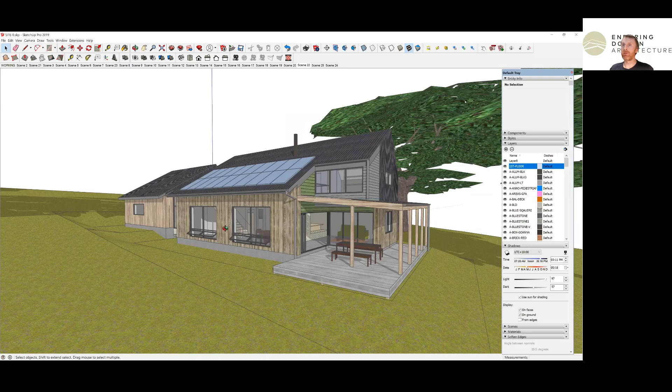There is a slope from east down to the west, and also some well-established mature native trees, so those things are all very important to show in the context of the model. In terms of the slope, we want to have an idea of the amount of cut and fill required to create that flat bench to put our slab down. We don't want any surprises when it comes to the amount of excavation involved. We want to know before the day how much cutting and filling is going to be. The structural engineers want to know that too, so they can design their footings appropriately.

Also, the trees - it's a good idea to know where they are, how tall they are, just to see if there's going to be any overshadowing to our building.

So in this case, we've got photovoltaics on the roof. It's an off-grid home, so it's vital that they are exposed to the sun as much as possible. Not only that, but solar gain - the principle of sun entering the building via the windows in a controlled manner - is very important to actually heat our building for free during those colder months. But then we want to know that we can exclude that higher angle sun as well with our roof overhangs. So the whole thing is really a design tool to make sure we're getting the sun in when we need it, and not in when we don't want it.

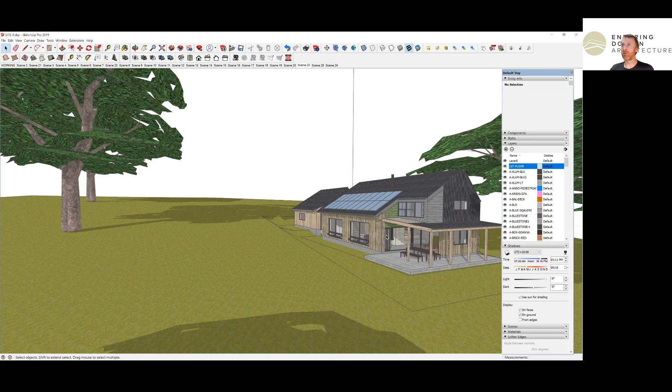So we can look at different times of the year, different times of the day, to make sure everything is happening as it should. So there's two elements to this building.

On the left is the garage, the shed. We have a glassy link, which is just a sheltered area to enter either of these buildings, that can also be used to propagate some seedlings, have a kitchen garden happening in a planter bed here throughout the year. The main house is in this bigger form here.

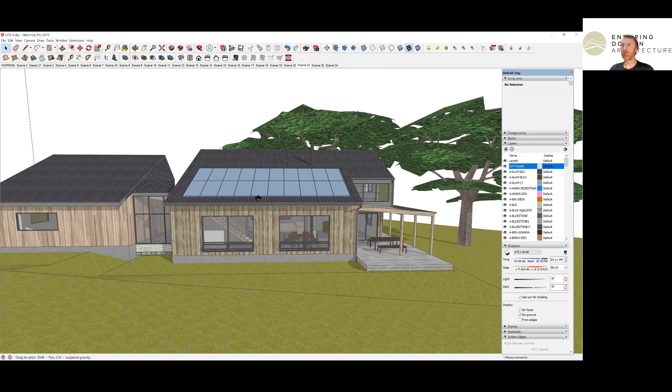It's not a huge building footprint, but we're packing a lot in because it's a loft design. We have a mezzanine floor - if I can show you a section - so we've got bedrooms upstairs overlooking this bigger volume. We're very careful about the proportions so as not to make these volumes too huge, so that it wouldn't be cozy feeling or difficult to heat.

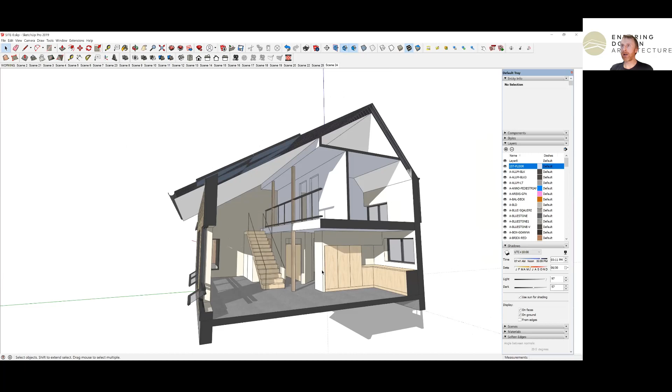We've got these lower spaces at the back on the south side, which will be quicker to heat up. We've got this masonry heater at the back here, so heat will flood these lower spaces towards the back before spilling out into our main space, and then going upstairs into the bedrooms.

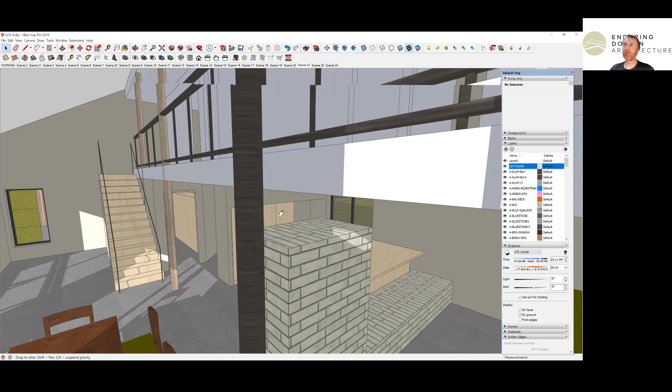So we've got this catwalk kind of access where we can look down onto the void below. We're borrowing lights, we're allowing air to move through the building. We've got these awning windows down the bottom, which we can open up. So in summer, we open up these ones up the top here and get this stack cross-flow ventilation to cool our building. So no air conditioning will be required in this building.

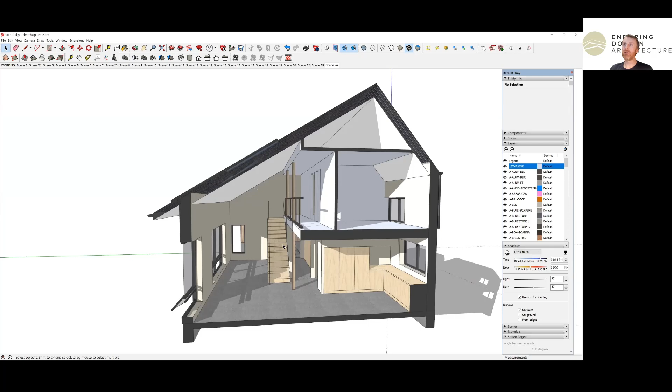A bit of heating with that masonry heater - they've got plenty of access to firewood, so that's quite a self-sufficient, sustainable form of heating. They won't need to be burning a lot of wood to heat such a home.

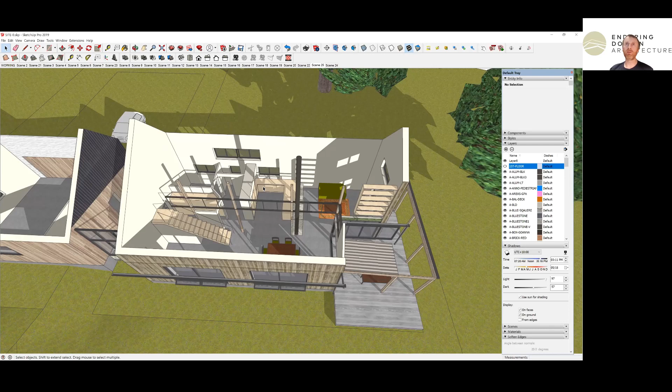I can show you with the roof off how all that's working together. It's quite a compact form, so there's not a lot of surface area compared to the amount of volume we're enclosing. That's the ideal thing we look for in an energy efficient home, so we don't have a lot of external surface area through which to lose heat. You lose heat even through good insulation, through good windows, just at a lower rate.

So if I stop that share, I can show you some photos.

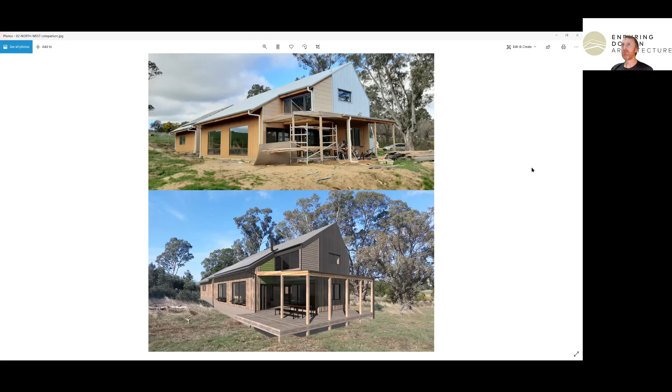Okay, let's have an actual tour of the built thing. So here I am at a new home being owned and built by a couple of my clients out at Metcalfe. This is my first visit since construction started, and I must say I'm very impressed by what they've done themselves. They've been at it for quite a while, and the work is really amazing. This is actually a Hempcrete house.

What you can see on the outside of the building is a WeatherTex cladding. WeatherTex is a vapor permeable cladding product. In this case, they've also used it as permanent formwork for the Hempcrete, which is tamped internally within a frame. The WeatherTex stays on the outside, used not only as bracing for the structure, but also to give weather protection to the building. So that's a natural WeatherTex. It comes in that brown colour, but that does grey off as the weather gets on it, or you can oil it if you want to keep it a rich colour.

So there's two parts to this building. On the left hand side we have the barn, the garage, which has the plant room and the solar panels on the roof, which you can see. This home is actually off grid. Nothing here is connected to outside services, so they're completely self-sufficient for power, water collection, and waste treatment. Everything is dealt with and produced within the site.

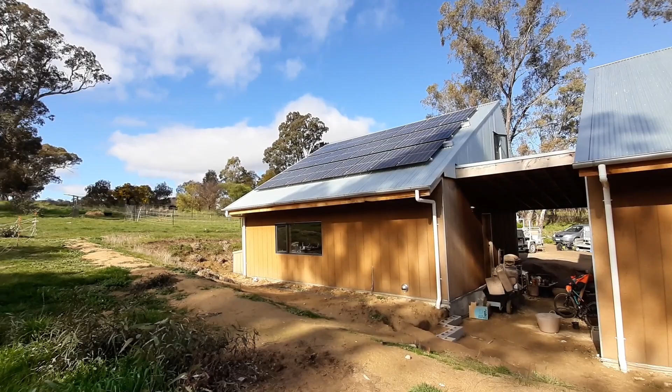Standing outside the north facade of the building, so the building is orientated to face the sun, which is in the northern part of the sky. That's one of the most crucial things when planning out a new home, getting large windows of your living areas facing towards the sun. This is going to get the sun in all day, or throughout most of the day, during the colder months when the sun is low in the sky.

Penetrating through deep into the building, hitting a thermal mass floor, storing the heat. This is what's going to give you free heat throughout the colder months and provide a fairly constant temperature to your building. But also in summer, conversely, any sun getting inside the building, or any heat building up inside, is getting absorbed by that concrete slab, which can then sink that excess heat down into the ground, being an infinite source of thermal mass. A lot of people talk about insulating underneath the slab as a way to better keep the winter heat in, and yes, that will happen, but you also have to consider what does that do in summer.

If you're getting a week of excessively hot weather, 35 to 40 degrees, and your building starts to heat up, does that heat have anywhere to go? Insulating under the slab can actually have an adverse effect. Once that concrete slab is saturated with heat energy, there's nowhere for it to go except back into your building, further heating it up. So we carefully consider whether or not we insulate slabs.

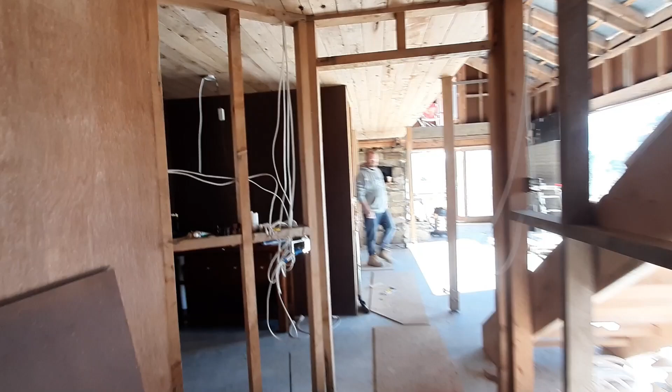It's all right, you're only on video. Here's the hard workers.

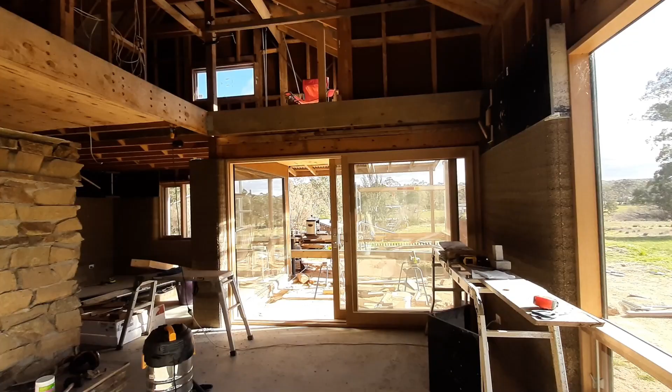This is a section of completed Hempcrete wall. At the top you can see this black form ply which forms the shuttering or formwork. This section on top of the wall is where there's still Hempcrete yet to be tamped down into the void that's created. Below, you'll see horizontal lines - each band is a layer of Hempcrete tamped into the formwork. This formwork moves up the wall as you complete each section.

As soon as this is dried enough to move that formwork, it can be removed and lifted up. So we're just going up the wall in small sections, tamping that Hempcrete mixture - which is like a wet mixture - into the formwork, into the void, which is about 300 millimeters thick. So we've got 300 thick walls, quite a thick, sturdy wall, and you get a sense when you're inside the building that it's a very solid feel.

Even though only half the building is currently Hempcreted, it just feels very calm in here. It's got a great feel, so we can't wait until it's all completed to feel what kind of space it's going to be.

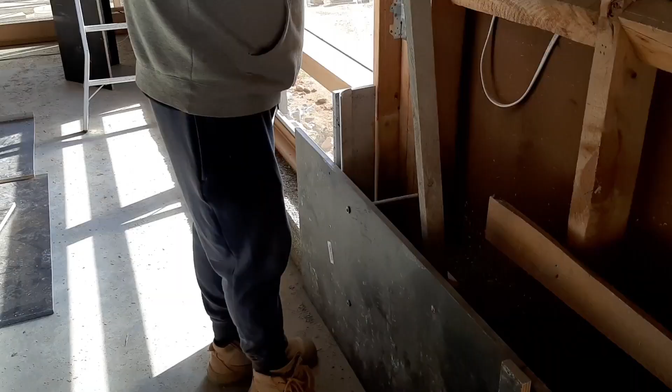Okay, here's a live demonstration of tamping. Jamie can do it, anyone can - look how easy that is. Tamp, tamp, tamp, tamp, tamp. Get it all nice and evenly compacted into our formwork.

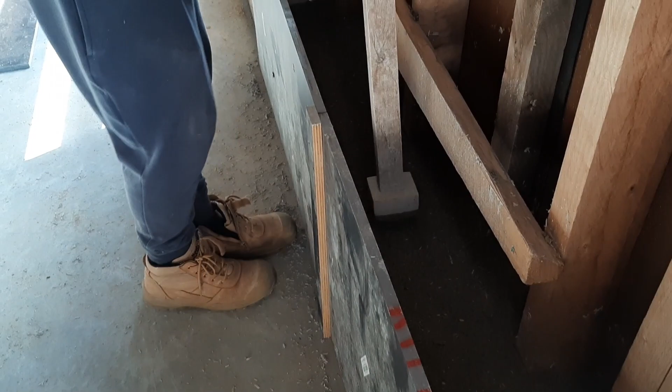You can see that formwork is bolted temporarily to the frame.

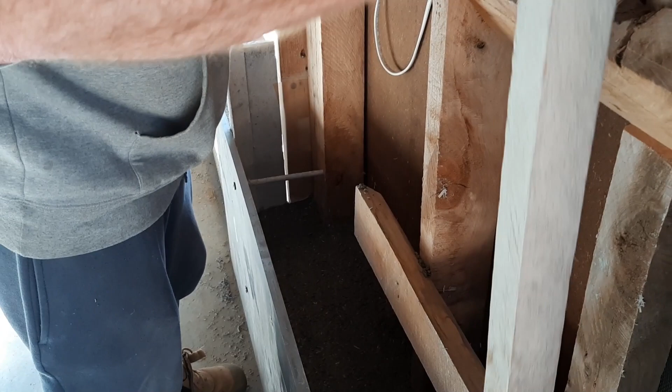These guys have also milled all their own timber from Cypress macrocarpa - milled all their own timber for the framing, which came from some local trees. So a very hands-on project.

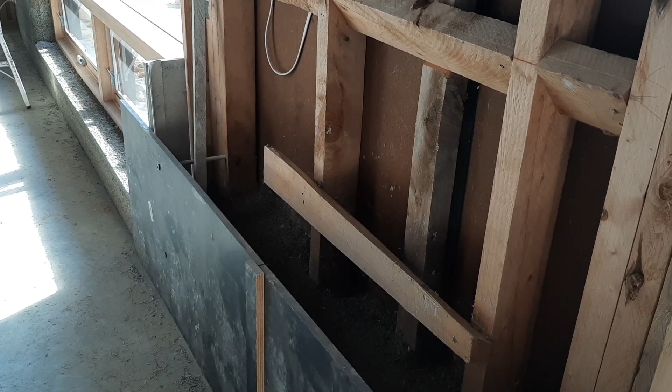And not a lot wasted on this building site either. All that formwork will be used for something else, probably for lining out the shed later on. Very little waste created, I should say.

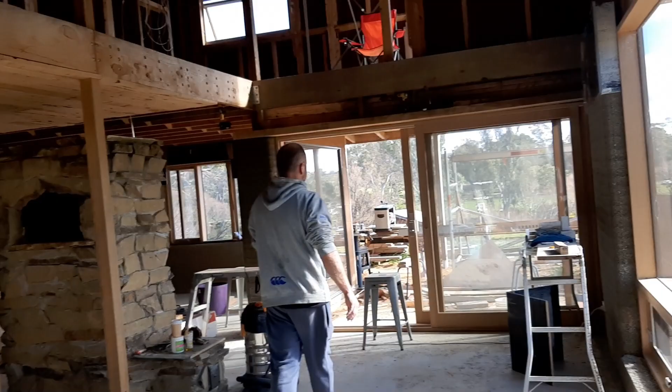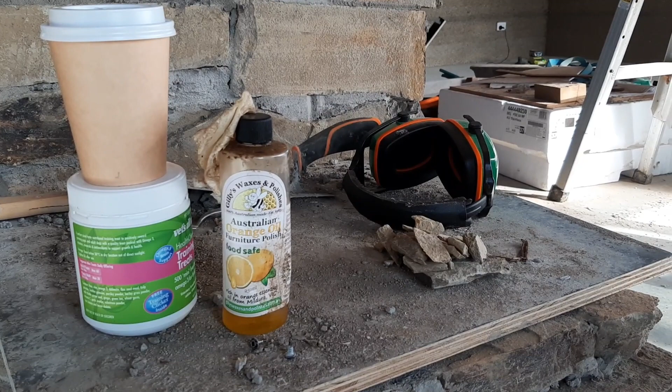Jamie was very proud to show me how much waste there was left over after the masonry wood heater construction - just that little handful of rubble. That was all the waste from the stone laying here.

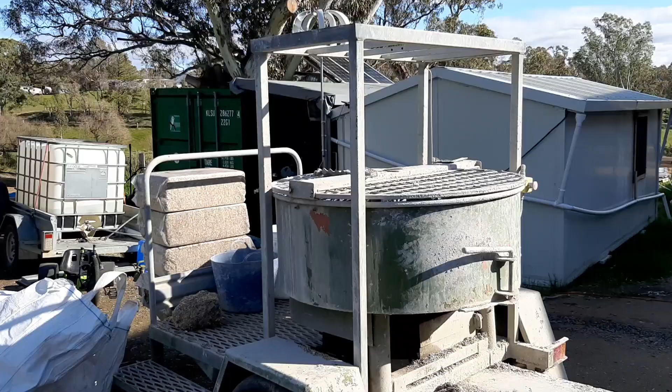This is the mixing station here. This is basically a giant mix master where all the ingredients for the hempcrete are combined together. So over the back you can see the packaged bales of hemp. That's the raw product.

So that gets fed into this mixing machine along with lime. We've just got some bags of lime here. That together with water in the right mixture.

So Jamie and Ness have been at this for a while, and they've got the hang of the right ratios. It's quite important to get the right ratios of lime and water together with the hemp, just so that the hemp sets hard eventually, but doesn't dry too quickly or become brittle. So that's something they've definitely had some good early advice on.

They've done some practice walls first, and now they're quite confident with doing the walls of their home, and so far achieving very good results.

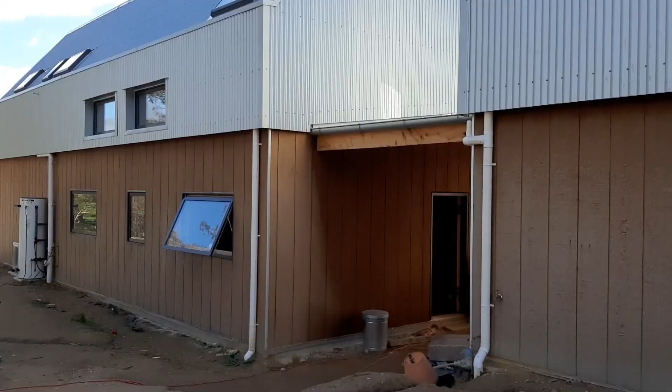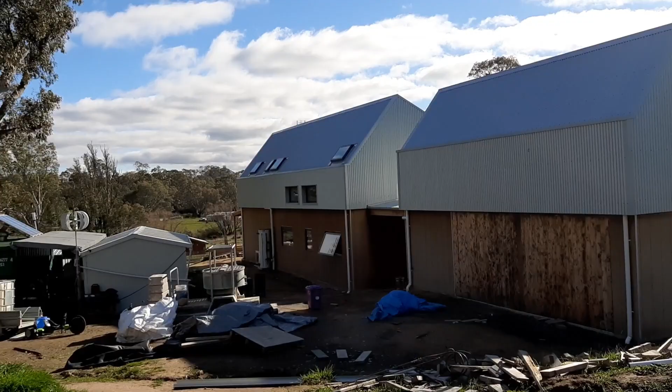So I hope you agree that the building as it is, although not finished yet, is really looking quite amazing. The commitment of Jamie and Ness, the owners, to seeing through the design as we envisioned it, and a lot of the design was their idea.

So it was very much a collaborative process. My job was to take their ideas and to combine all the practicalities of building regs into something which was going to be workable, something doable.

But definitely they've committed themselves 100%, going along for the journey. They've been very hands-on with the whole building. They've had professional assistance with the concreting, the plumbing, some carpentry help with the framing, but they've been there the whole step of the way. They're doing all the hempcreting themselves now internally, and no doubt they'll be doing a lot of the fit out and finish as well.

It's unbelievable, I guess, the environmental footprint of this building in its construction. They've really set out to minimize it. So all of the timber framing, the timber floorboards, they've sourced some local cypress trees.